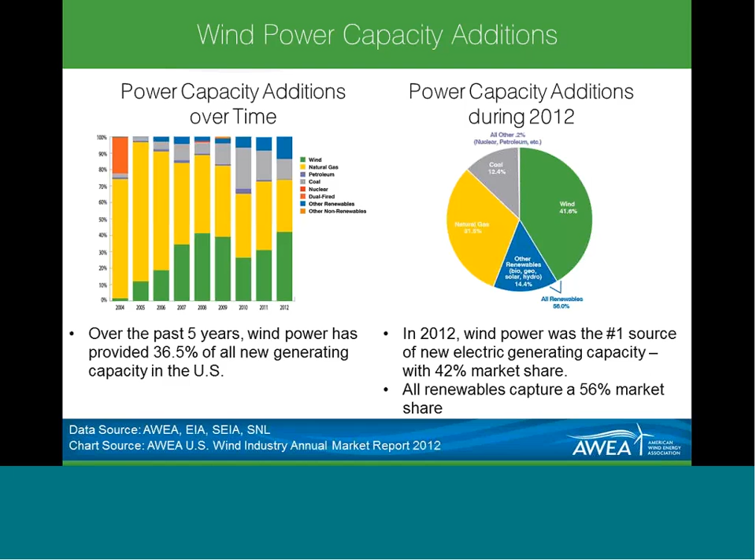In addition to that, with such a large installation base, wind has driven significant new investments. Last year alone, the industry invested over $25 billion across the U.S.

Here's just a quick state breakdown of where these installations are. Obviously, Texas, California, and Iowa are our biggest states with more than 5 gigawatts of wind. Texas down there is sort of the anomaly with more than 12. We're also seeing states like Washington, Oregon, and the Pacific Northwest, states like Illinois and Indiana in the breadbasket area, and then New York and Pennsylvania in the Northeast really contributing significantly to the installed base.

We've also seen the emergence of typically non-traditional wind states growing their wind businesses. Think of states like Alaska, Hawaii, Michigan, New Hampshire, Ohio, Rhode Island, and Vermont. These states have all doubled their wind installations from 2011.

As turbine manufacturers develop taller machines with larger rotor diameters, project developers are capable of accessing more marginal wind resources. Ohio stands out as a case in point, where these taller towers are able to provide an installation base really close to the demand centers.

We've also seen the emergence of new states into the scene. Nevada and Puerto Rico installed their first projects last year. So we expect more of that to be happening as the technology improves moving forward.

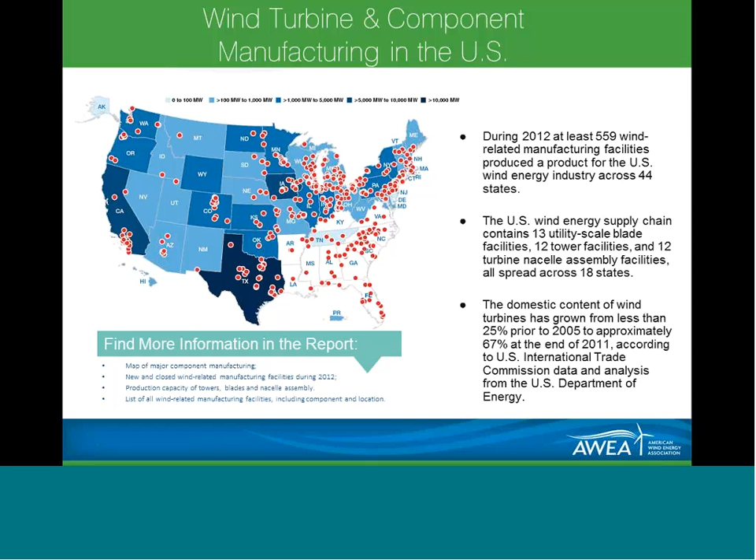I want to point out that on the tower side of things, we saw significant market consolidation last year. Two tower facilities and two nacelle assembly facilities came offline, and a further six tower facilities exited the wind industry. So there could be potential for bottlenecks when it comes to towers, especially given the implementation of a tariff on Chinese and Vietnamese towers. But for other components, there's pretty good production capacity moving forward, enough to meet expected demand I think.

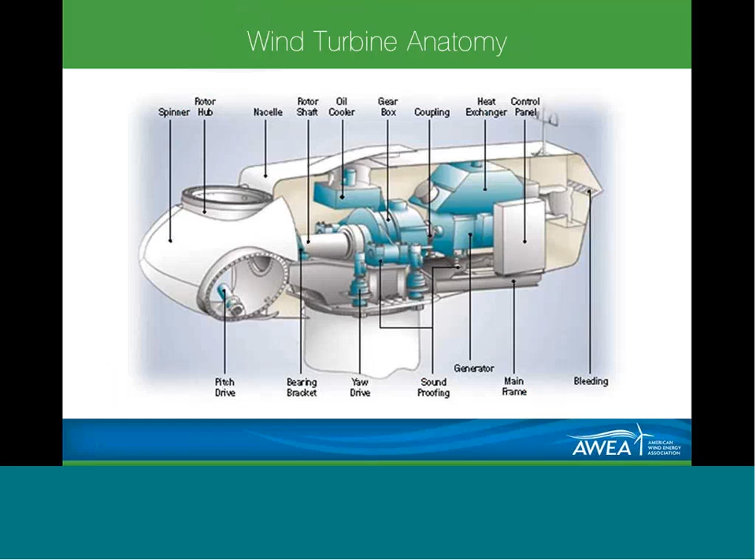Now, in keeping with the theme of the webinar, I want to highlight some opportunities for manufacturers to enter the wind industry. This is a nice cutout of a wind turbine showing the various components that help the machine run. If you're involved in manufacturing products like generators, gearboxes, rotor clips, bearings, or brackets, you could have a role to play in the wind industry.

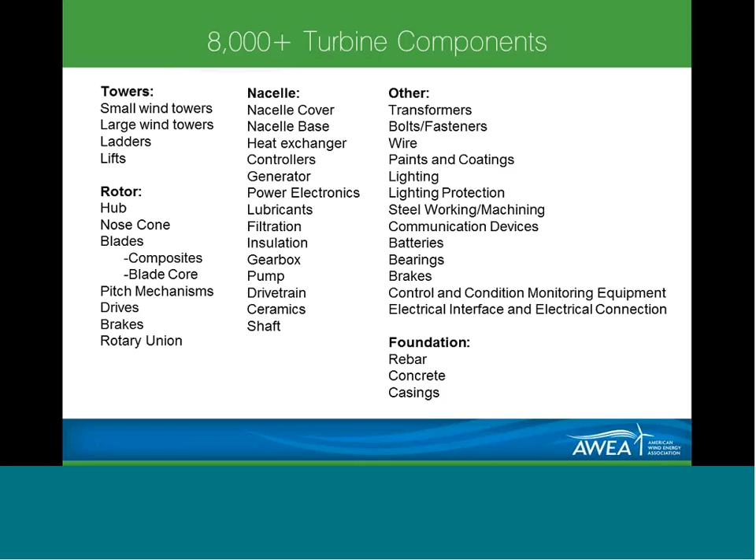This slide gives a breakdown of the product categories summarizing all the components that go into the machine. In a typical wind turbine, there are 8,000 different components. So typically people think, well, I don't make a tower, I don't make a blade, I'm not assembling any turbine, so maybe I don't have a role to play. You might want to take another look - there's significant opportunity here. Even if you're doing things from lighting to lubrication, bearings, brakes, you could have a role to play in the industry.

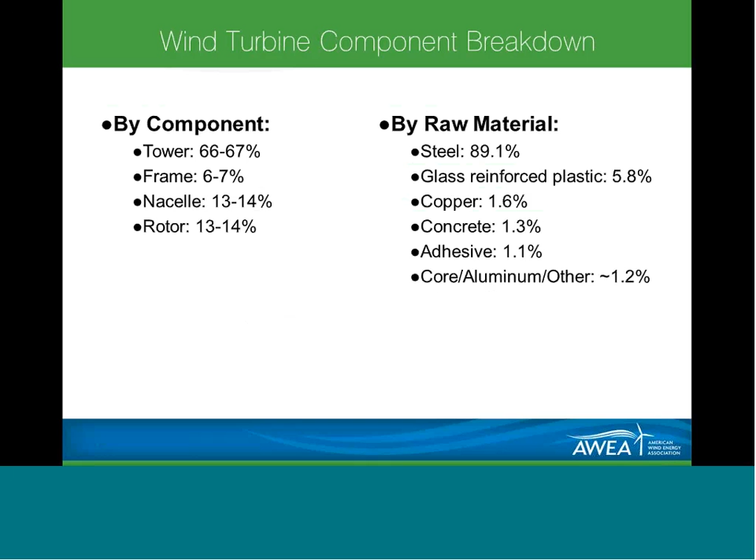Here's a nice breakdown of the components by weight across the wind turbine. You can see that the tower comprises the heaviest amount of a wind turbine and drives a significant amount of steel usage in the machine. But you can also see glass, copper, concrete, especially as tower manufacturers look towards concrete towers - some other materials starting to be used.

Now I want to shift focus to look at turbine manufacturing market share and explore some trends we've witnessed in turbine technology over the past decade. Within the United States, over 59 different wind turbine manufacturers have installed a machine. While there are a lot of turbine manufacturers, the top 5 OEMs tend to dominate the market.

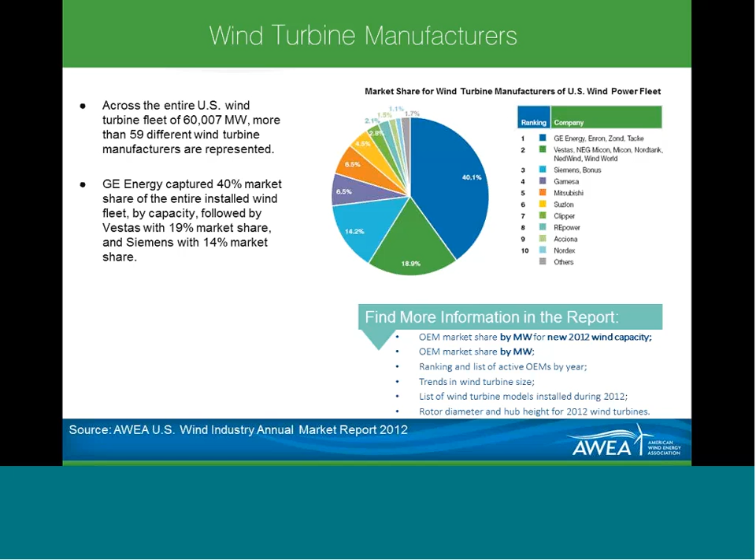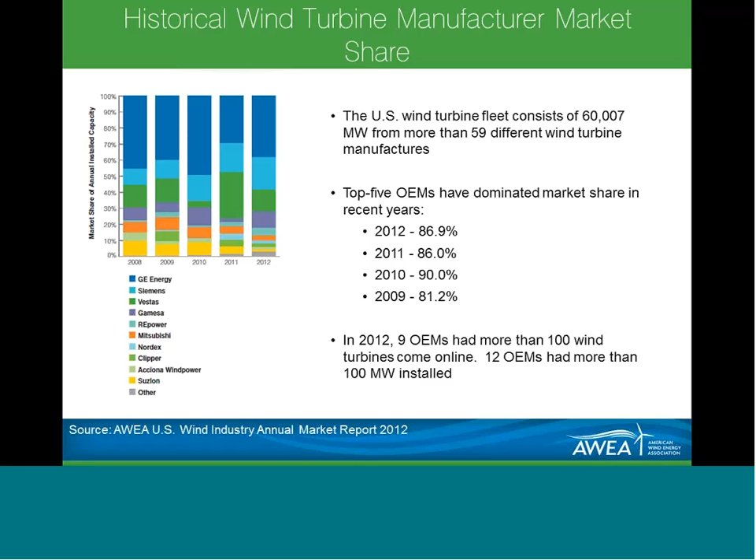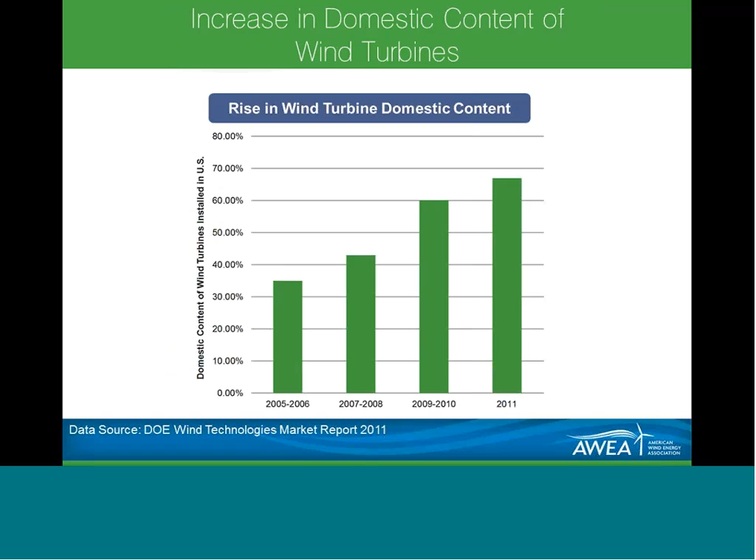One important thing to note is that this represents a significant increase historically. Just 6 years ago, there were only 6 wind turbine manufacturers operating and installing machines in the U.S. This increased to 17 in 2012, so we've witnessed pretty significant growth. Alongside this, we've seen domestic content of wind turbines increase substantially. In 2005 and prior, wind turbines consisted of about 25% domestic content. In 2011, this had risen to 67%. A stable policy environment invited turbine OEMs to establish manufacturing centers in the U.S. and entice their entire supply chain to relocate as well, helping to bring down the cost of these machines.

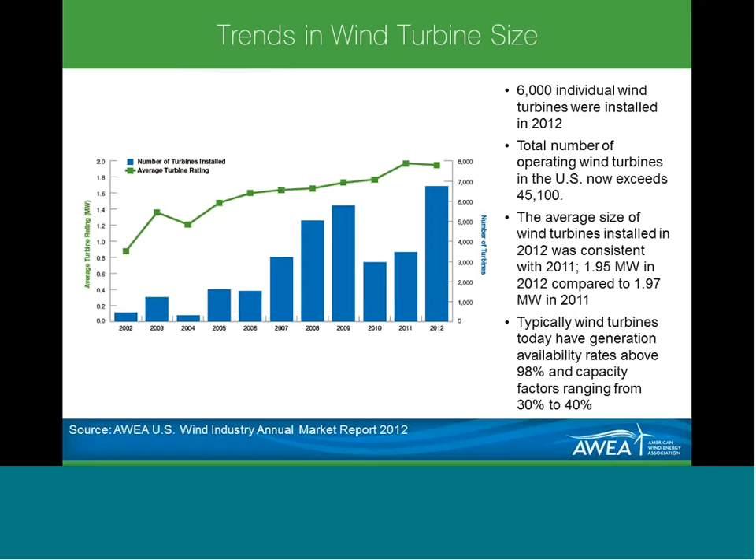Now let's look at trends in turbine technology. The average megawatt rating nameplate capacity of these machines has increased substantially over the years. In 2002, a decade ago, we were averaging below 1 megawatt. Now we're looking at 1.95 megawatts in the U.S. While these turbines have become larger, they've also become more productive and reliable. Newer wind turbine models have generation availability rates above 98%. The implementation of taller towers, larger rotor diameters, and better siting technology have enabled most wind turbines to achieve capacity factors ranging from 30 to 40%, a significant increase in production of these machines.

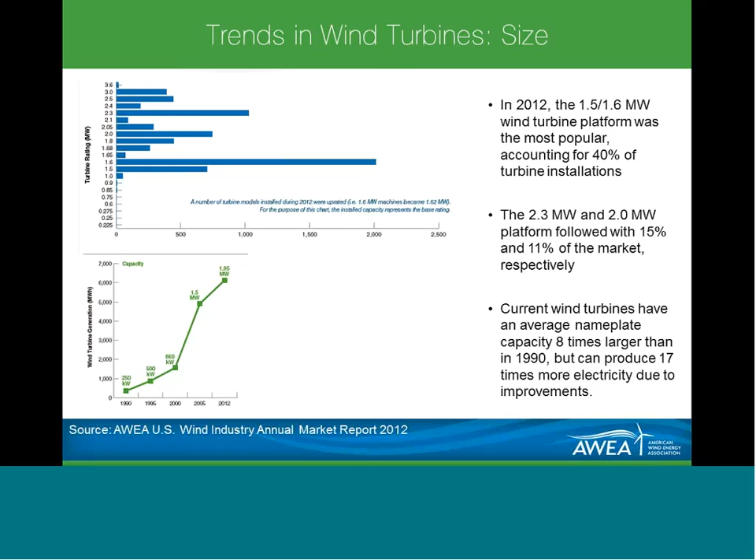To wrap up, I want to hit on some of the benefits that the wind manufacturing industry and the wind industry in general promotes. The wind industry is a significant source of quality, high-paying jobs across the United States. Wind manufacturing comprises about 25,000 jobs for Americans. We're a significant force in the U.S. economy - a $25 billion investment in 2012, in addition to more than 80,000 jobs provided by the industry.

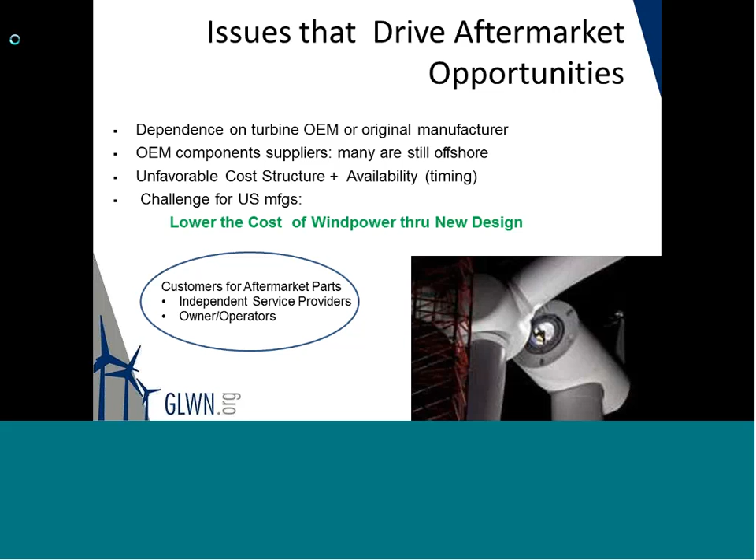So what are the criteria for getting into this market? Here's a short checklist. New designs need to meet specifications. You need to at least cover or enhance the performance. Folks are looking for cost reduction opportunities to drive a change, either through a lower price or indirectly by providing something more, maybe a longer life or easier to maintain. Lastly, any new component of the turbine has to be approved by the owners.

Many companies right now are working on procedures to give them a formal system and a capacity to evaluate new U.S. products as replacements. That has been something taking time to come, but as I talk to owner-operators, that is where they're heading now. They're systematizing this to provide a faster qualification period.

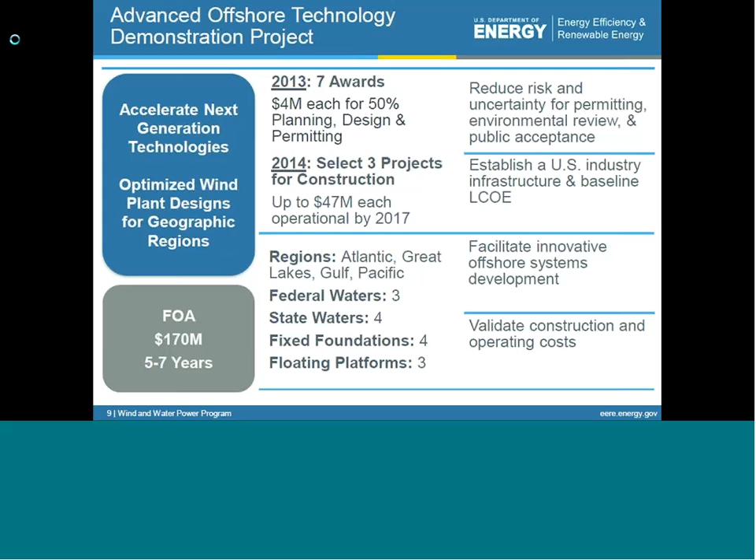So when these happen, what kinds of supply chain requirements are needed? I'll leave out the turbines—let's just talk about the local requirements. Foundations.

I am frozen. How do I get this to move? Well, my slides are frozen, so let me just go on.

I'll tell you what you could see if you could see the next picture. I'd show you a picture of an offshore monopile, which is basically 300 to 700 tons of steel plate—a big welded, fabricated steel tube that's used individually for shallow water installations.

The second type is gravity foundations, similar to what's used for onshore large concrete structures, with fabricators, welded steel rings, and a skeletal structure and steel forms that go and rest on the ocean or sea floor.

Supplier selection criteria: I use something called QDCC, quality, delivery, cost, and cash flow. These are what I evaluate my worldwide supply chain on.

Quality: parts to print every time, no question. Ensure the CTQs are right and not overspecified. It's easy for engineers to tighten tolerances down more than necessary. I saw this recently with bearing raceways for my main shaft, where the concentricity requirements were overdone, causing us to do an extra high-cost operation that turned out we didn't need.

Delivery: meet delivery promises every time, with reasonable or better lead times based on what my customer needs. I'm only responding to my customer, and our customer base has shifted. It used to be that they'd put in an order and say, we're going to get permits and we'll be installing that turbine in 6 months, and you could count on it. But permits turn out to be a very volatile part of the process of putting in wind turbines.

Our customer base has shifted. Now they don't order the turbine until after they have the permits in hand, and once they have the permits, they want it installed yesterday. So we don't have concrete lead times the way we used to, and the supply base needs to respond to that.

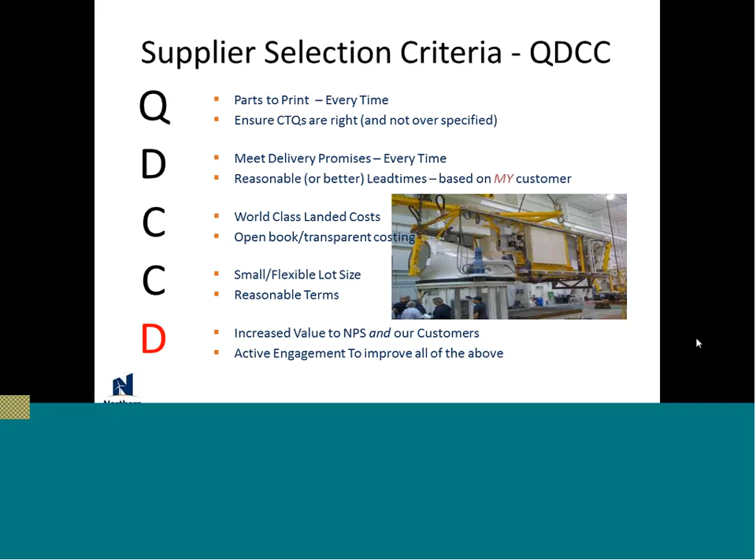Linda, next. Sorry, keep hitting. I put a couple of these, were originally designed for an in-person presentation. My apologies to the audience.

Domestic supply chain advantages, talking about the U.S. versus China. There are two main areas where I can see U.S. suppliers have the capability to have an advantage over your international counterparts, but you have to take these areas and work them into adding value to my business, which is take advantage of the fact you're closer. What can you do because you're closer?

Pre-shipment verification in terms of quality. Delivery, again I'm going down QD, CCD. Transport time, total order to delivery time. There's a major one that people can excel at but don't. They say, well, my lead times are equal, even though there's a 6-week ocean crossing coming over from Asia. Well, you should be much faster. Obviously transport costs can be lower. Ordering costs should be substantially lower without the language barriers.

Cash flow, good terms, help me take inventory out of the pipeline. Help me figure out between us, I'm not asking you to hold inventory, I'm asking how do we take inventory out of the total pipeline and become leaner, not as an individual business, but as a supply chain. That way we free up cash along the whole way. I'll be as creative as people coming to me.

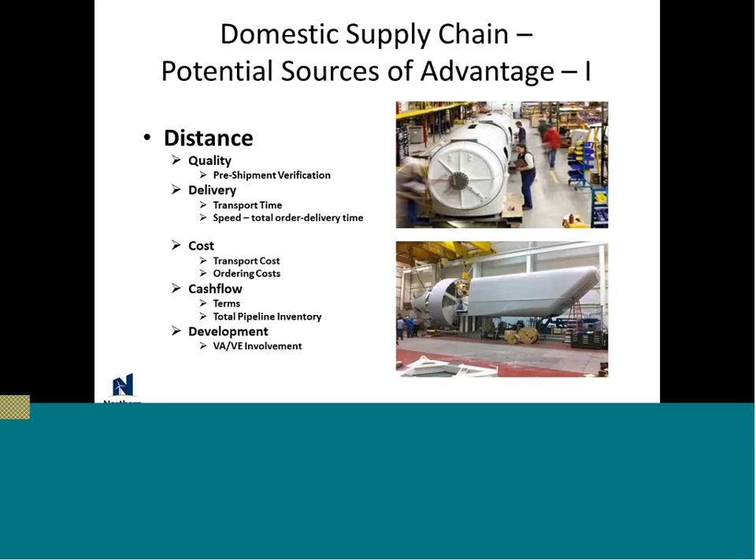So here's the other area, and this may seem trivial, but I'm going to emphasize this. You speak English, take advantage of it. The difficulties of communicating to Asia, not so much Europe, but especially Asia, are significant. Take advantage of that, figure out how to turn that into value.

How do you take process development and verification and put those systems in that work together seamlessly between our companies? How do we take advantage of warranty work and quick turnarounds if there's a problem? I don't want there ever to be a problem, but if there is, make sure it's solved quickly. Logistics cost, supplier to customer development is very expensive when there's a language barrier. It's not as expensive when there isn't.

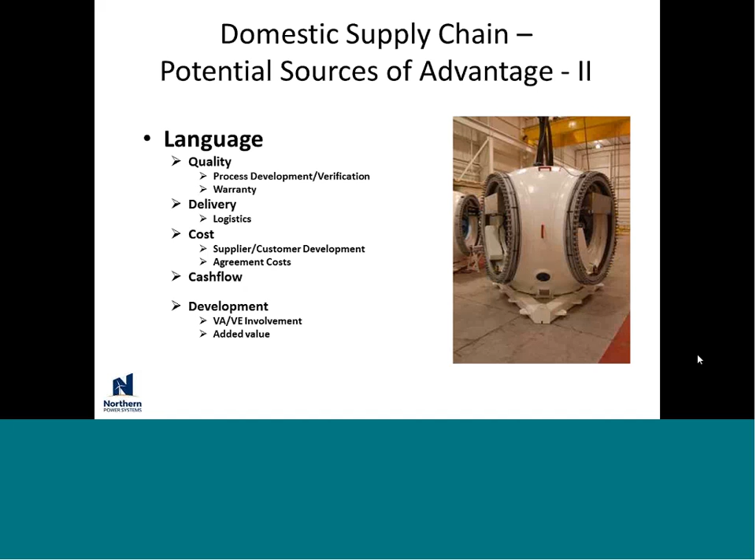Development, again, VAVE, value add. The language here, it takes a lot longer to do anything when I'm dealing with non-native English speakers. But to do that, take advantage of the distance and the language, and figure out how together we can make more money. If we take cost out together, then we get to share the benefit.

So U.S. domestic suppliers should have an advantage, but, and this is what Ed called my tough love speech when I was with him in Cleveland 2 years ago, I walk through a lot of U.S. suppliers around the world, and this, again, is tough love, but I see people that confuse being busy with being productive. Productive is taking cost out. Busy is everybody doing something.

Standard costs. A lot of suppliers and a lot of U.S. industry have embraced various forms of lean processing, whether it's JIT, TPS, or Lean Six Sigma. But what I've found is even if they've embraced it and excelled at it on the manufacturing floor, their cost accounting systems are still stuck in the 1950s and 60s. It doesn't reflect the true leanness on your manufacturing floor, and since those accounting systems usually drive pricing decisions, the product ends up overpriced and you're losing opportunity. So look at activity-based costing as opposed to standard costing, and attack those activities.

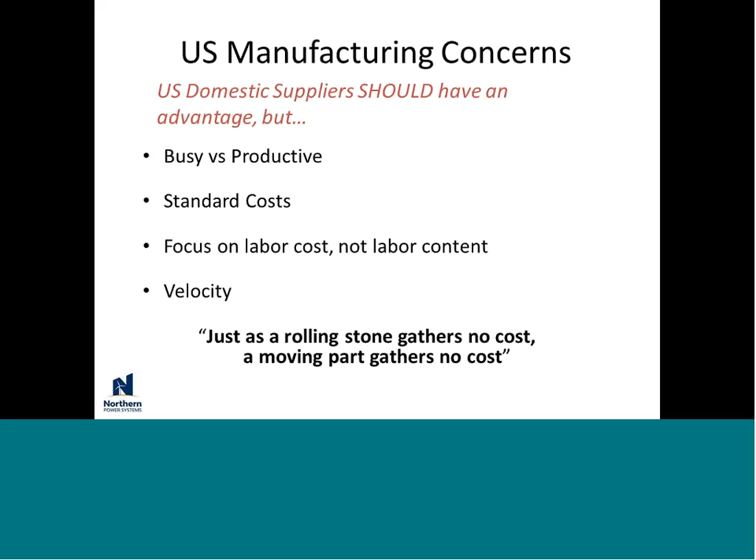So actions I recommend: competitive costing. Know your total landed cost to my dock versus the competition. That's what I evaluate you on. I don't evaluate you on your price, I evaluate you on your total landed cost to my dock door.

Open books. Let's talk about those cost drivers. Let's figure out if a particular tolerance is causing an issue, let's talk about that tolerance. What can we do? I want to take cost out more than you do, trust me. Create value, help lower my final product cost. I've got a supplier that helped me figure out how to change a communication system, dropped $4,000 a turbine from my customer's cost. The customer took a piece of it, we took a piece of it, and the supplier took a piece of it.

A win for everybody. World-class cost: high productivity, Lean Six Sigma, JIT. For those of you who aren't familiar with it, there's a body of work called Factory Physics that comes out of Northwestern University in Chicago from Professors Hopp and Spearman. I can't tell you enough, take your lead manufacturing engineer, buy him the textbook, have him read it and adopt it.

And then finally, be profitable. I want my suppliers to be profitable, reasonably profitable, not excessively, not minorly, but reasonably profitable. Because I want my business to be important to you. I want to know that you're making enough money so that if business picks up, you're not going to dismiss me or push my orders out. I want you to be profitable, reasonably so, because you're going to be a stronger supplier, you're not going to cut corners, and you're going to give me the quality that I need and the products that my customer needs.

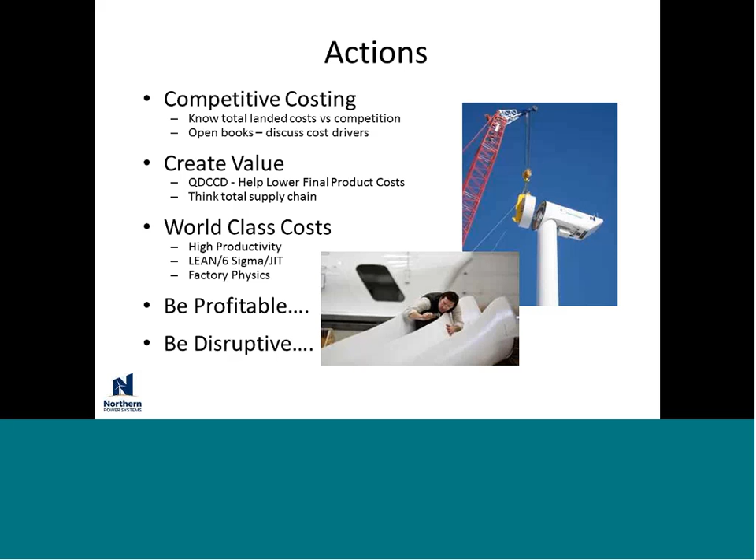So figure out how to be creative. Don't be afraid to say, I don't have to do it the same way it's being done now. Focus on the end goal and what it takes. So I think that's it.